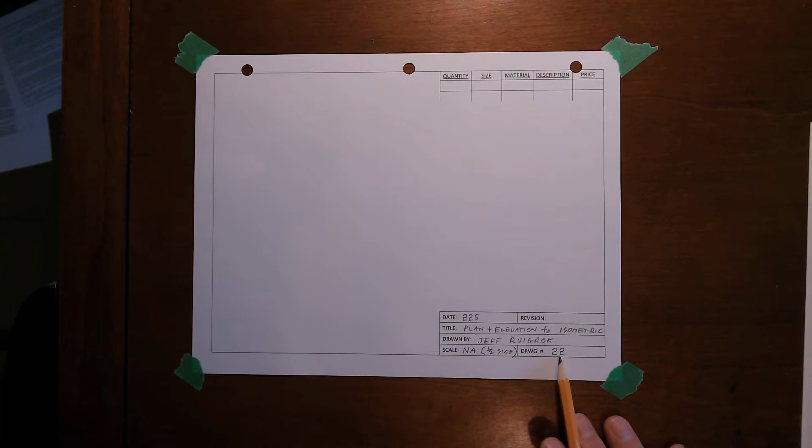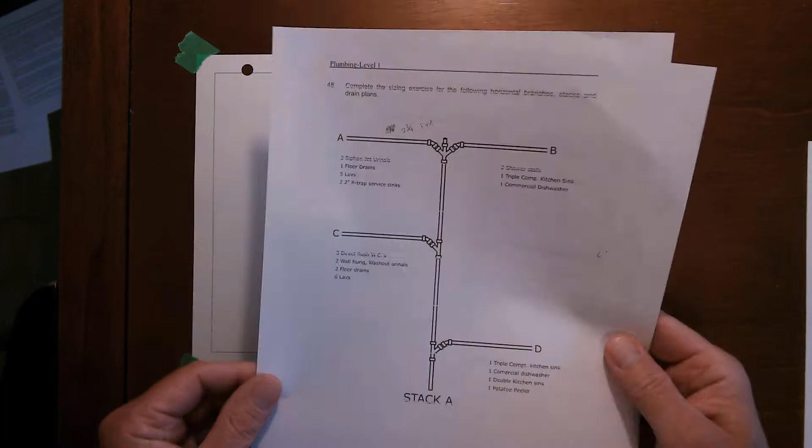And this is drawing number 22, and it's directly related to the sizing of the stacks we did in the first part of this course. There was stack A, stack B, and then a plan view with the building drain and the building sewer.

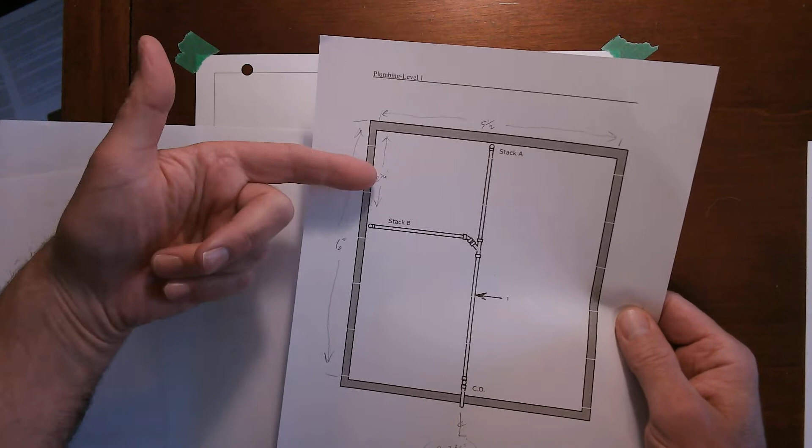Anyways, you can see I've got some dimensions here. So as I said, this is 6 inches on the inside, so I'm going to be drawing it at 3 inches. And this was 2 1/4, so it's going to be drawn at 1 1/8. That's it for scale. Think of it as a custom scale, if you will. Anyways, we're going to draw this in isometric. There's not a lot to it beyond the detail box, which is what I'm going to start with.

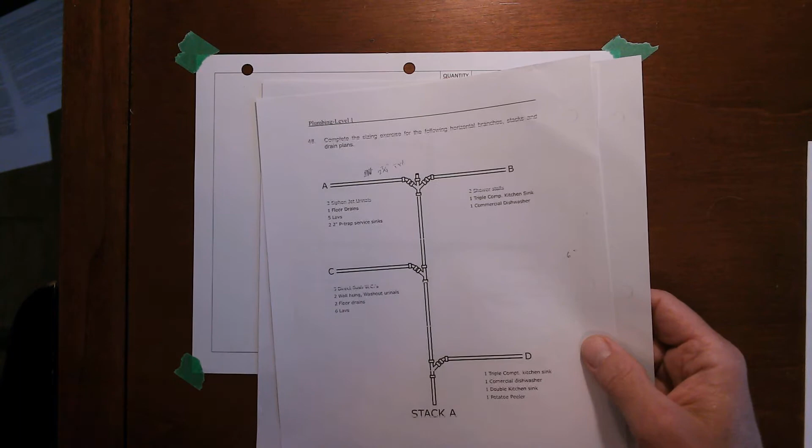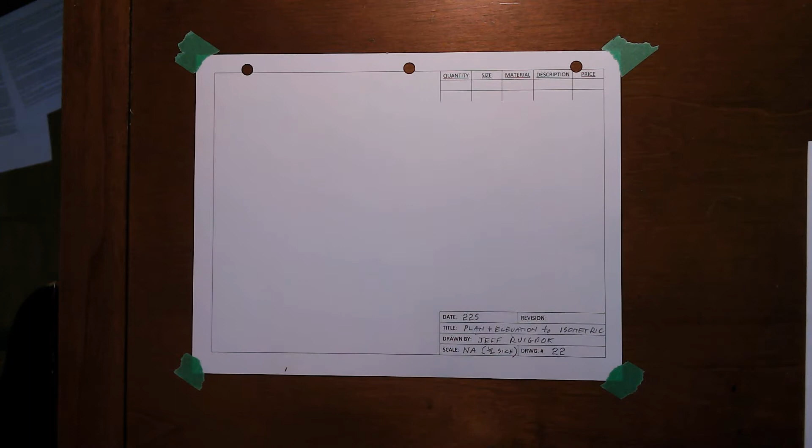In fact, I'm going to do this in reverse. I'm going to do the plan first, stack B second, and then finally stack A. Not obligated to do it this way, but I like to start with a solid foundation, which simply means, for me anyways, starting at the bottom and working my way up. Because this has a general outline, I'm going to use this general outline, the 6 by 5.5 or 3 by 2 3/4, as my detail box, and then I'll build my piping plan up from there.

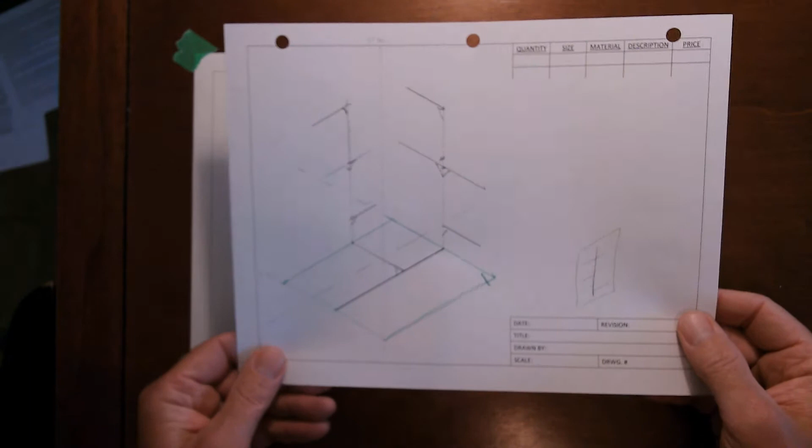A lot of the detail boxes we've been doing are three-dimensional. This one's not going to be, it's the green lines here. It's just going to be a flat one, but then you can see my building drain runs right through the center of the building with that horizontal branch going off to the side, and then the 2 stacks. Anyway, so this is my rough. I always have a rough to go along with my intended drawing. In this case, I had to work really hard to find the right size to fit.

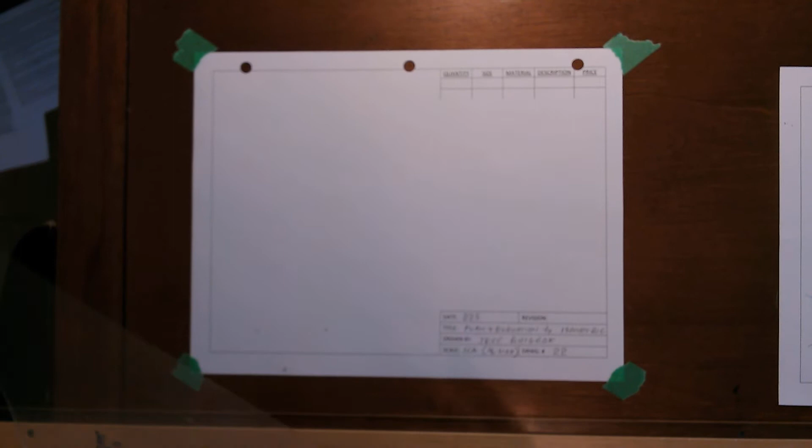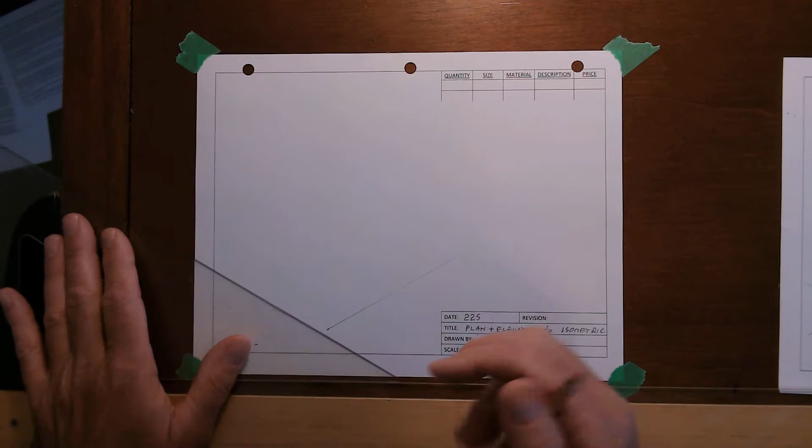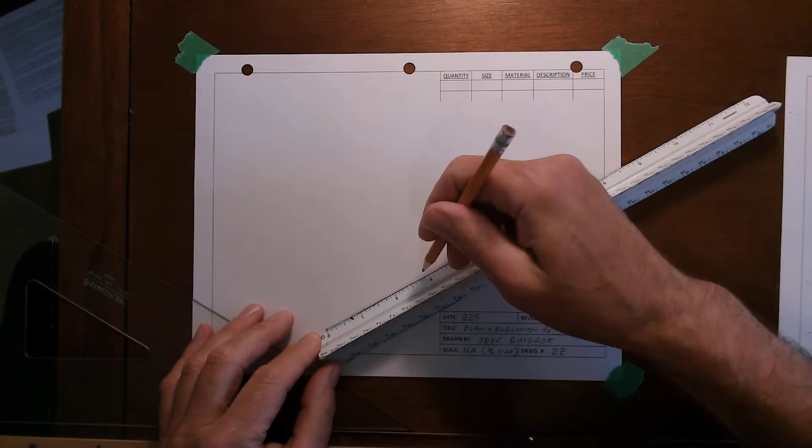Anyways, isometric drawing is a 30-degree angle. I'm going to start right here in the middle, down nice and low so we have lots of room. I'm not doing the vertical aspects of this detail box. I am merely doing the outline. But the same rules of the road apply here as they did to everything else. So this is going to be my 6 inch cut in half, 3 inch. And this one is going to be my 5.5 cut down to 2 3/4.

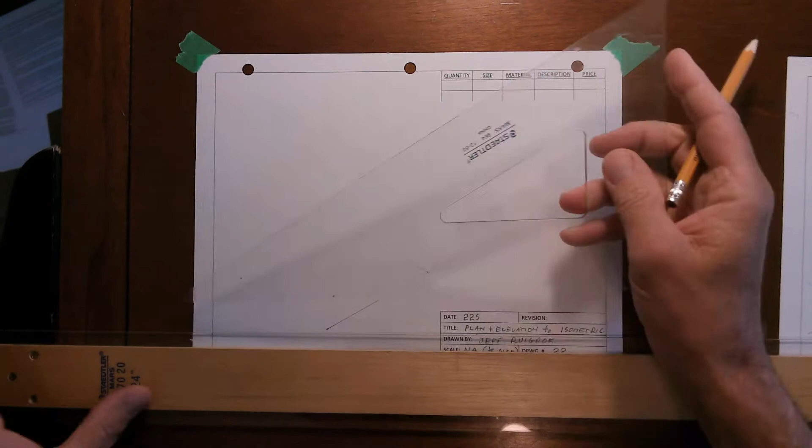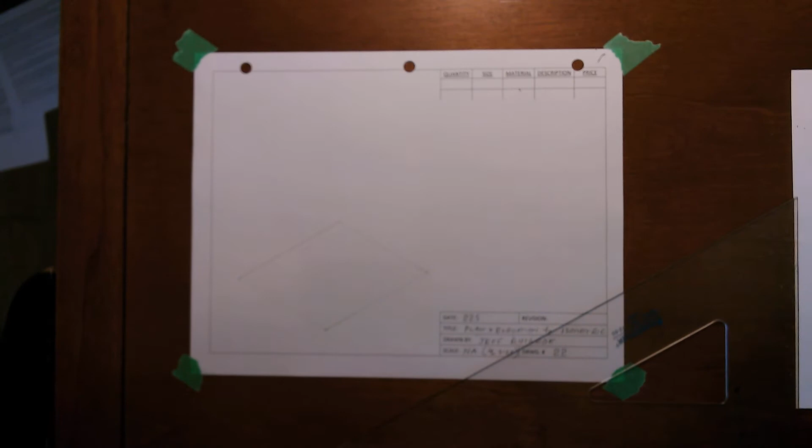So horizontal lines only. I'm not going to embolden this because it's not the piping that I want to show, so it doesn't help with my design intent. It just helps me with my strategies for drawing, and what I've been referring to as spotting. So in this case, I know my building drain runs up through the middle of the drawing, which is at 2 3/4, which I can cut in half. So I just need to find that dimension.

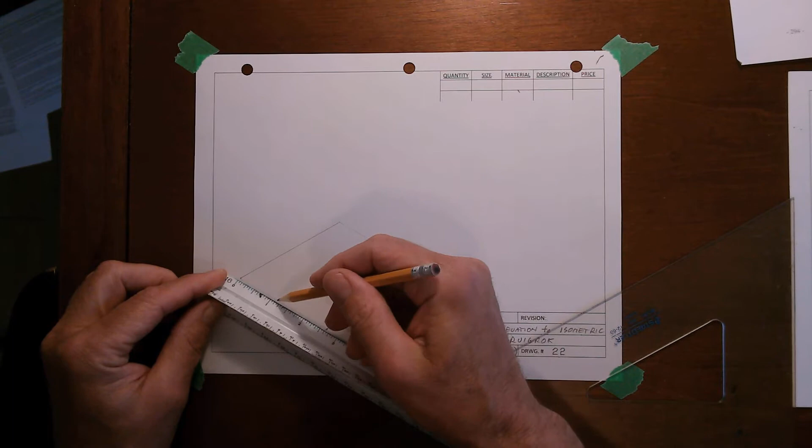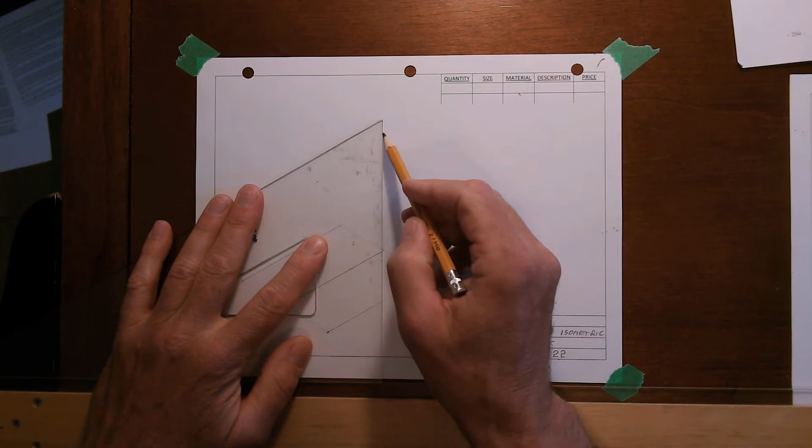So we got 1 1/4, 1 and... So there we go. So that's the center line here, and that's where my building drain runs, from just outside the building all the way to stack A. And then stack A just goes up. So that's the stack that goes vertical. And I can embolden this line because that's not going to change much at all.

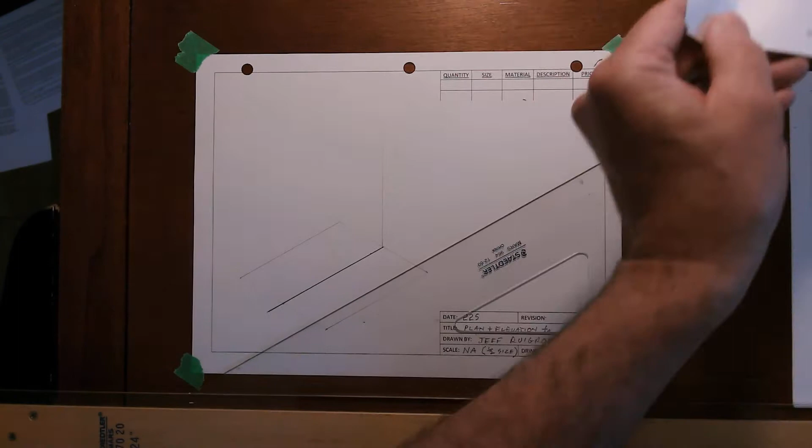Stack B is 2 1/4 inches down, so I'm going to make that 1 1/8. Again, I'm just going to mark it here and then draw it across. So I'm using the detail box to put all my measurements on. So 1 1/8.

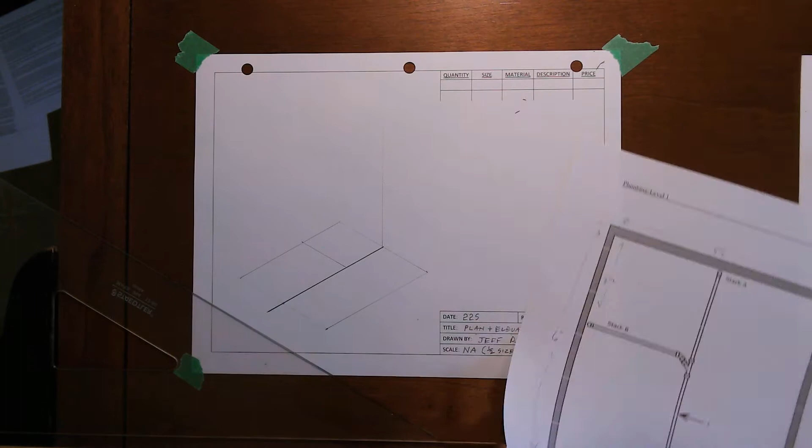Now, here is the first trick to drawing isometric diagonal lines. And the term that I'll sometimes use is draw it square and shave it a hair. So you'll see that there's a 45-degree elbow here and then a Y fitting. So I can't just draw straight into this. In fact, you're not allowed to lie a TY down on its side. Remember, this is looking down. You can't have a TY here. It must be a Y.

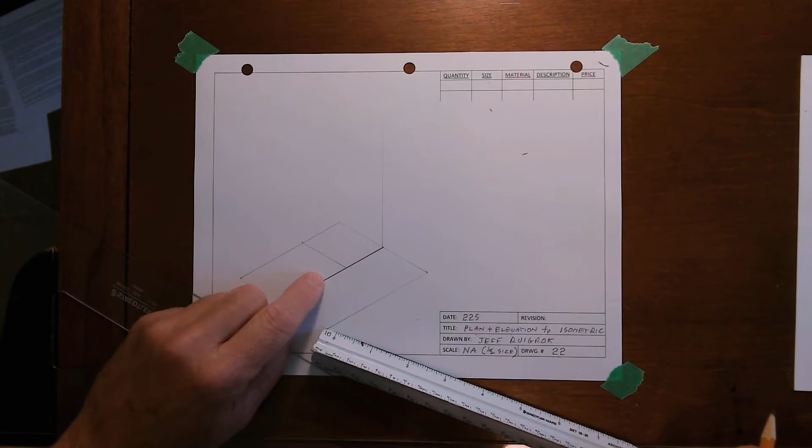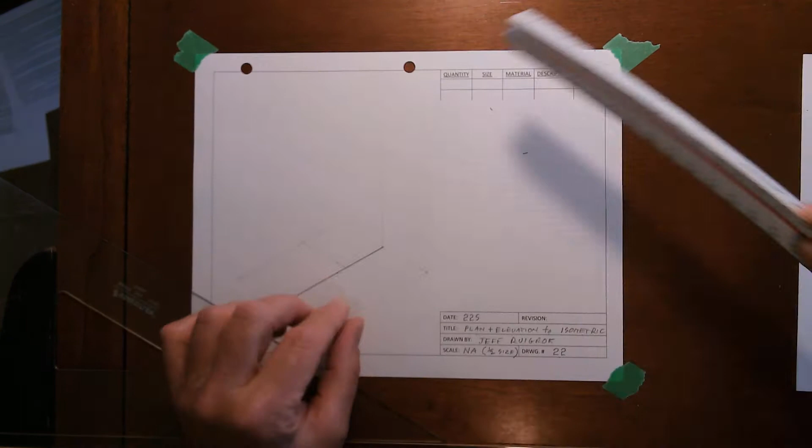So when I say draw it square, I mean draw it just like at right angles. So this is an isometric right angle. And then if you go 1/4 inch that way and 1/4 inch that way, you'll have an equal 1/4 inch. You have 1/4 inch this way, 1/4 inch this way. So that means you've got a 45-degree angle in between.

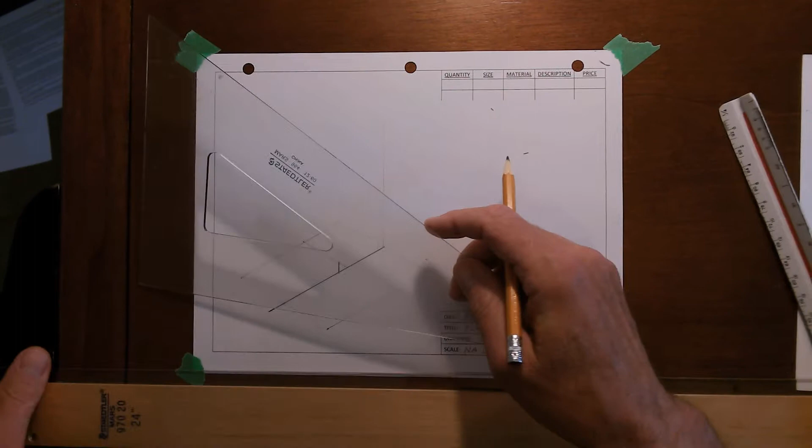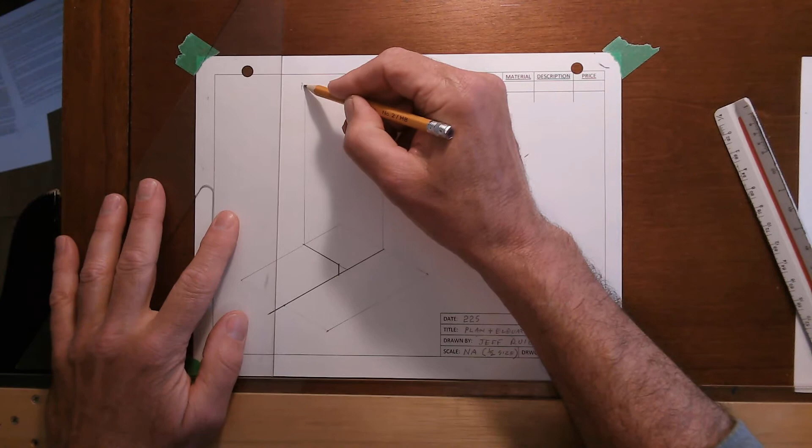And you will see that this 45-degree pipe looks vertical. I assure you it's not, but unfortunately, whether you like it or not, oops, the camera's in the way, it looks it. So there's stack B. So this is A, this is B, and this is point 1 on the drawing.

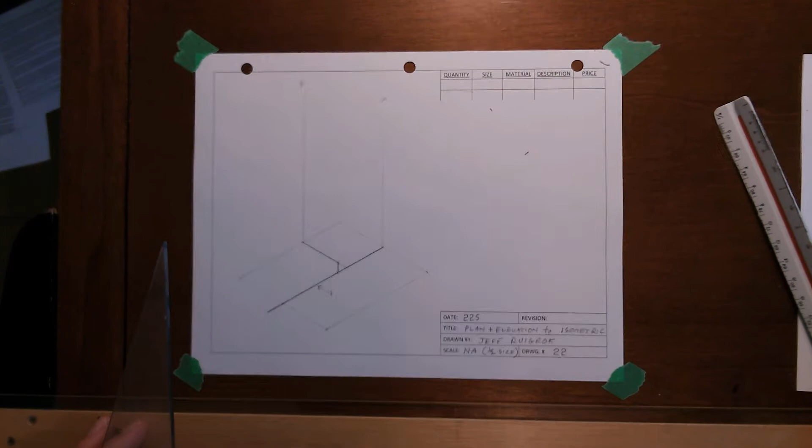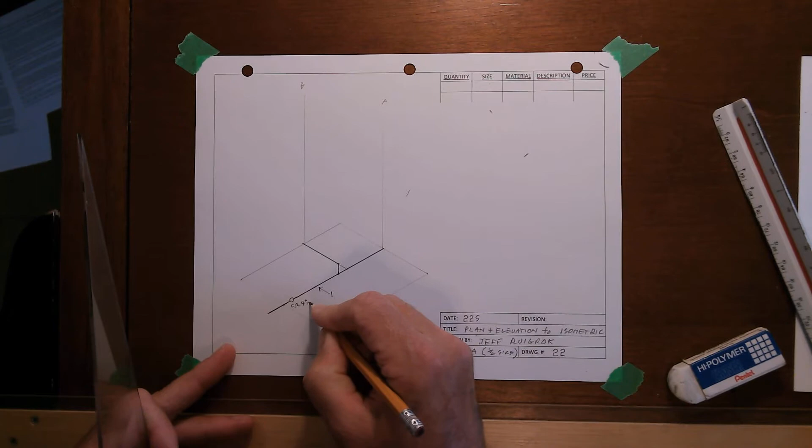I suppose if you wanted to, you could also put a clean out, because it does show one here. And because that's the building drain, you also know it's 4 inches minimum. Okay, there we go. So this is what I call draw it square and shave it a hair. You just draw everything at right angles. Then you create your 45-degree isosceles triangle here with the 2 equal sides. And then you know you're 45 degrees across. Anyway, so there you go.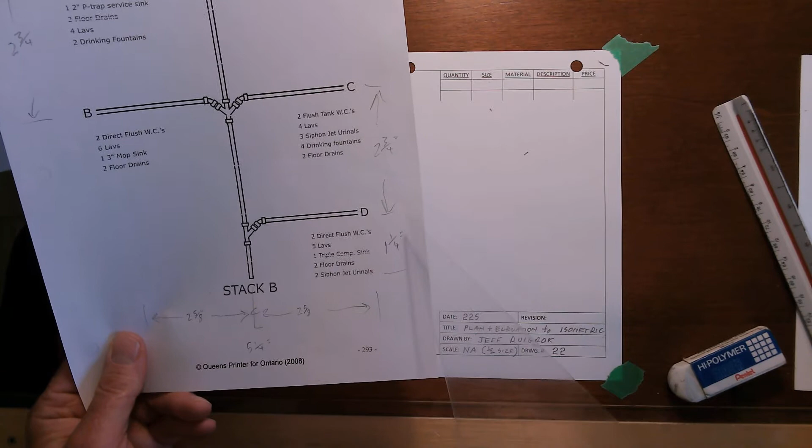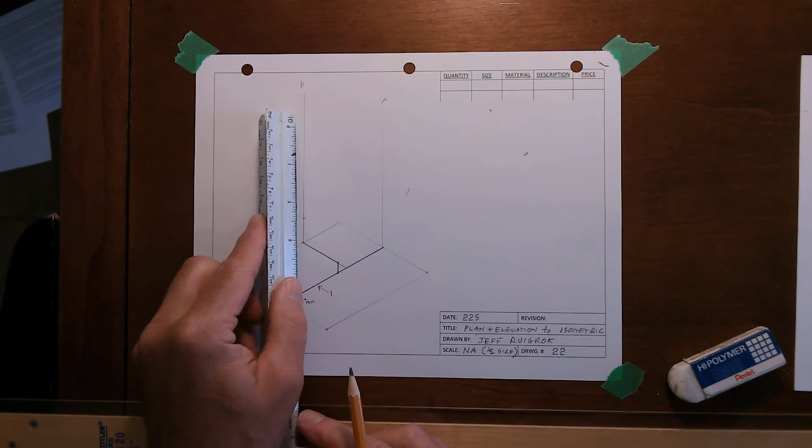So there's that one. Next one will be stack B. And we have 1 1/4 up for branch D, and then 2 3/4 of an inch above that for C and B, and then the same again for A. So I will, of course, again cut those all in half. So 1 1/4, so I'm looking for 5/8 to the first one. Jeez. My ruler's not fitting in here. So 2 3/4, so that's 2 1/2, 2 3/4.

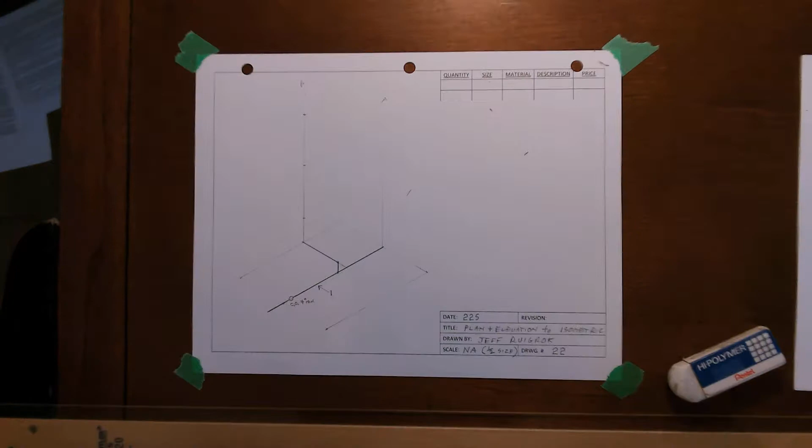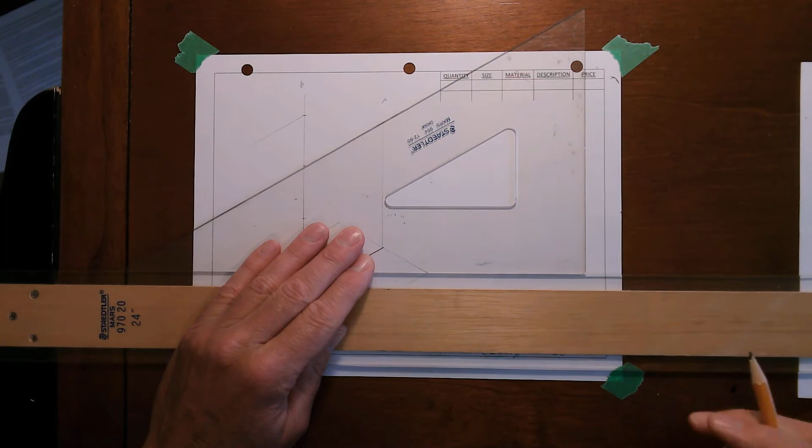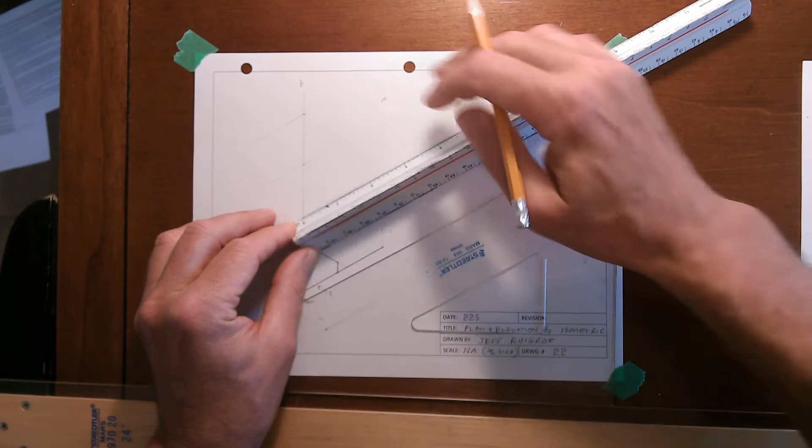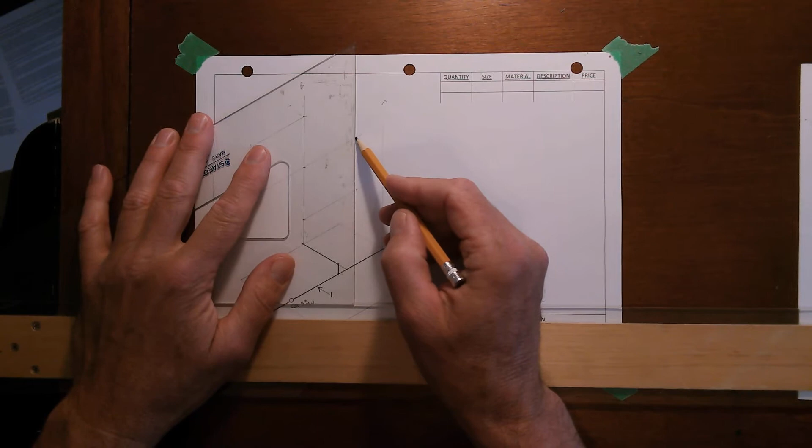So A goes to the left. This would be B and C. B goes to the left, C to the right, and then D just to the right. These are in fact 2 3/4, so 1 3/8 out. Didn't quite draw this one far enough, did I? Remember, you only have to measure once, and then you can use that measurement in your T-square to make it identical all the way around.

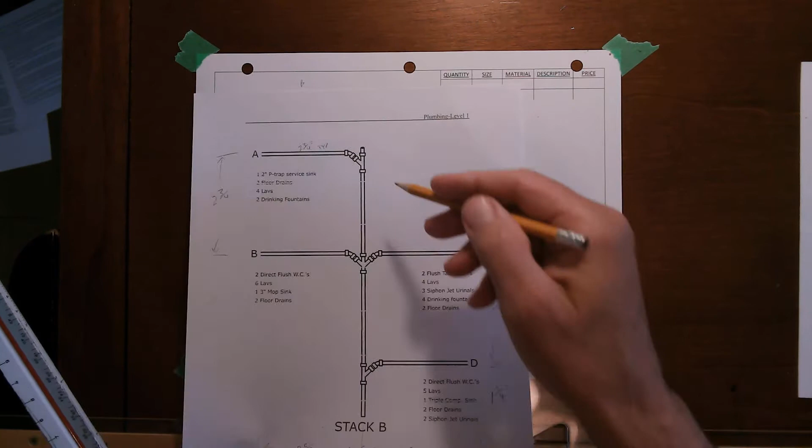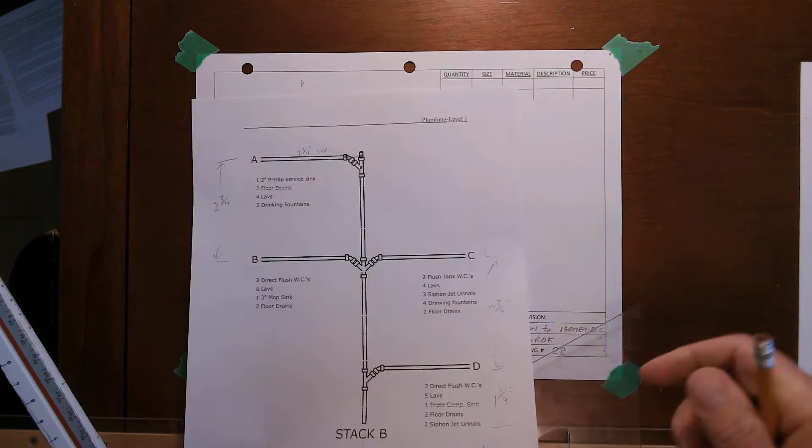So the same thing for these. This has actually got a 45 with a Y and a short piece of pipe. Same here and there. So this is a single Y, a double Y, and a single Y. Anyway, so we just have to, again, this distance between here and this distance between here and here. So the inlet of the Y and the distance between the 45 over is equal. So if this was 1, this would be 1, this would be 1.4142, right? So there's typical offset calculations. So I'm just going to go with the 1/4 inch again.

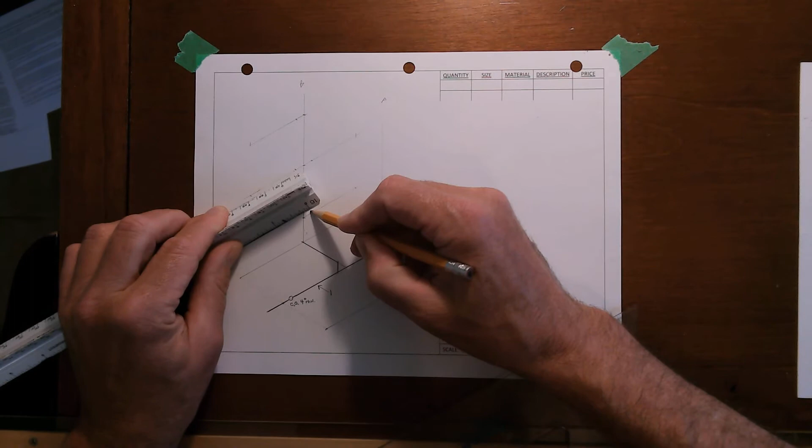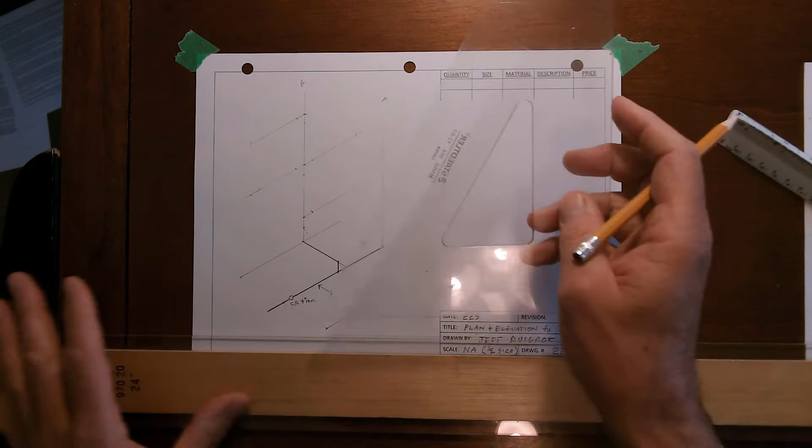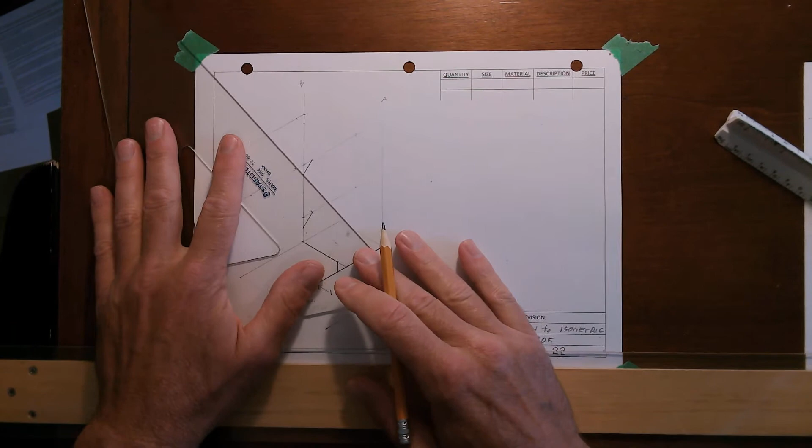And then a 1/4 inch down. And what you will find is that when you're doing a 45-degree angle on a vertical stack, you'll find it to be about 60. So you can create a rule here if you want. Diagonals off the vertical can be drawn at 60. I don't know if it's going to work quite so well on the other side because you get some perspective shift here.

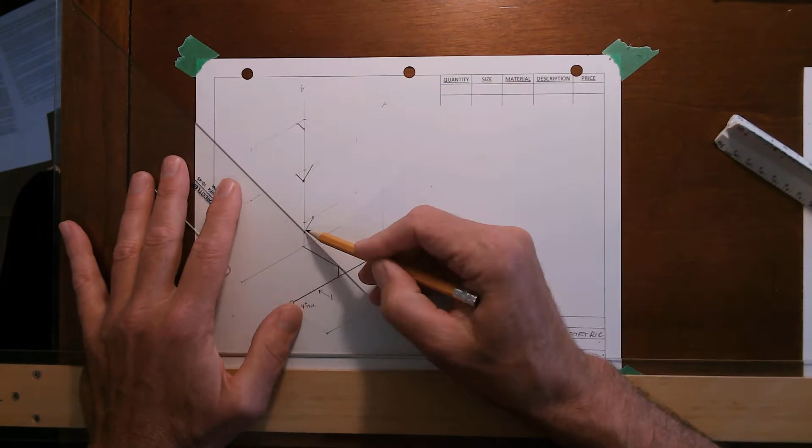I suspect this one's going to be 45. Yep, close enough. I'm going with close enough. Obviously, I could use the measurements. Nope, that's it. I'm going with close enough just to make my life easier. But you can just go from tick to tick.

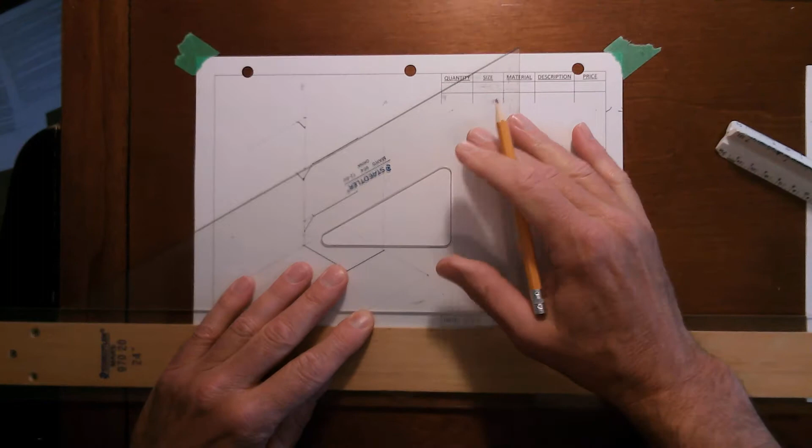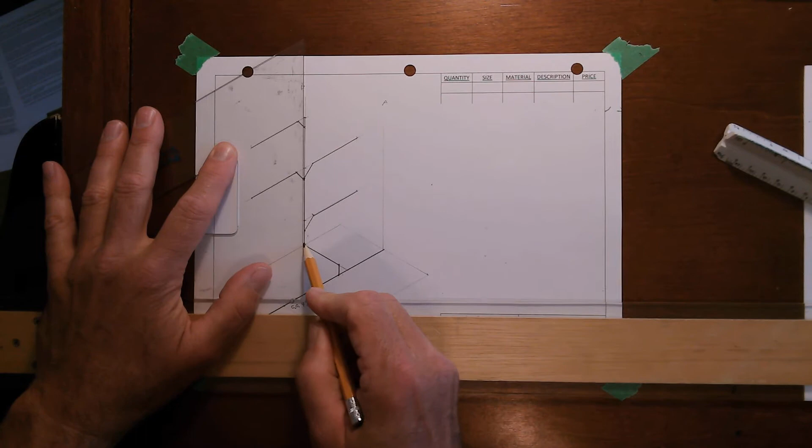I think it's important to point out that isometric drawings are also called artistic renderings. So there's tons of artistic license when you're doing isometrics. As a matter of fact, in reality, when you turn a box towards you, and then flip it up at 30 degrees, the lines appear to get about 20% shorter. There is such a thing as an isometric scale that we're not using.

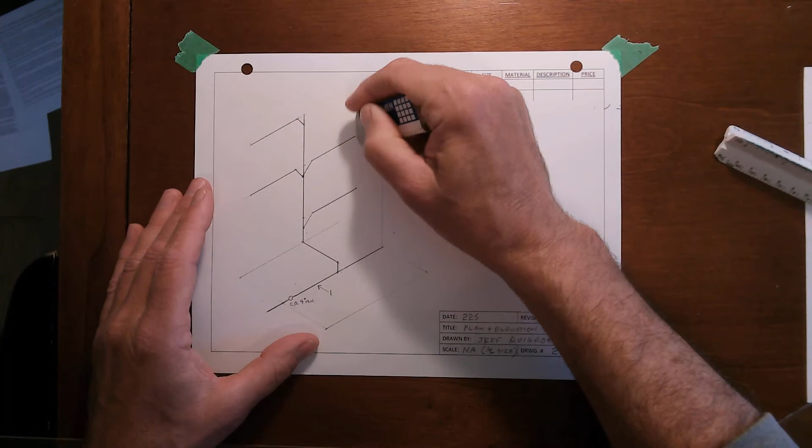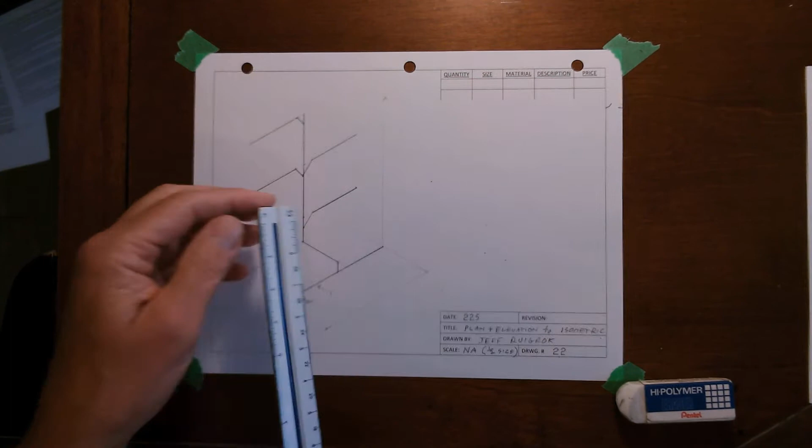It would make our drawings more accurate. So you can see how that's starting to come together. Now let's do the next one. So it's going to be the same, which was 5/8 up from the bottom. Oops, get the right scale here. So we have 5/8 up from the bottom.

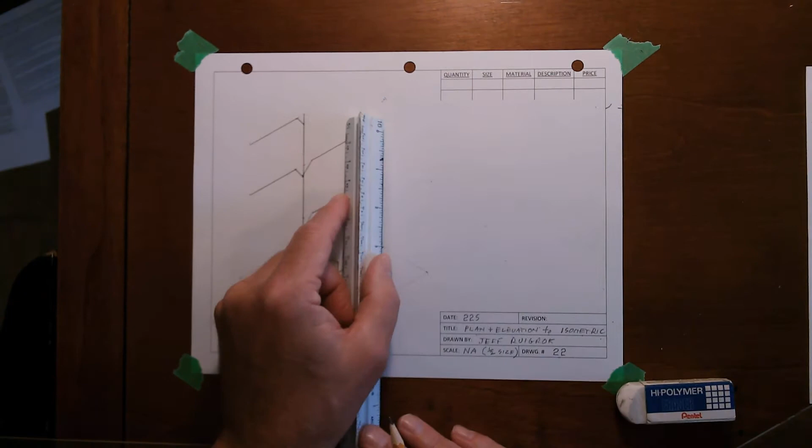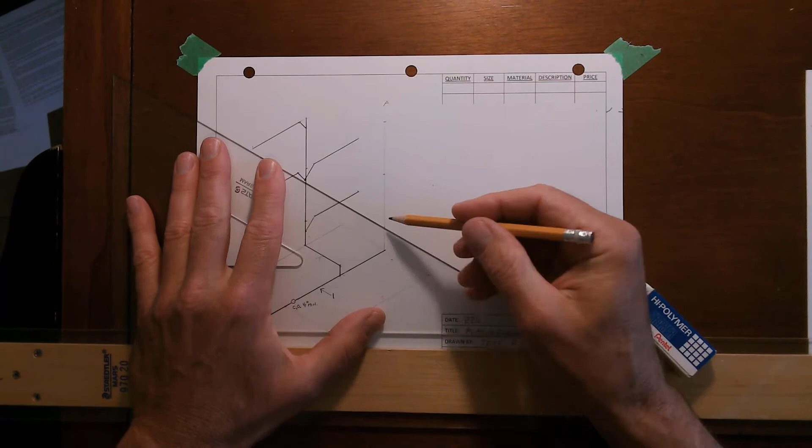And then we had, what was it? Oh, 1 3/8. Is that all we did? And then 1 3/8. Oh, we're not quite tall enough for this one. And for this particular stack, the lowest portion, so this is stack A, D at the bottom ran to the right. C ran to the left. And AB ran both directions.

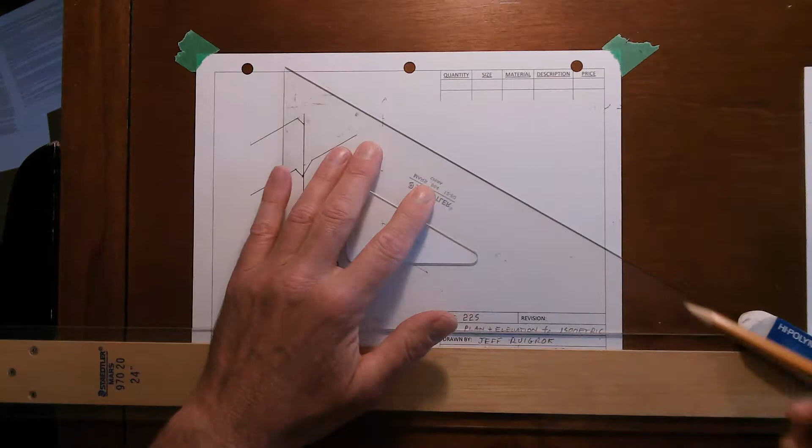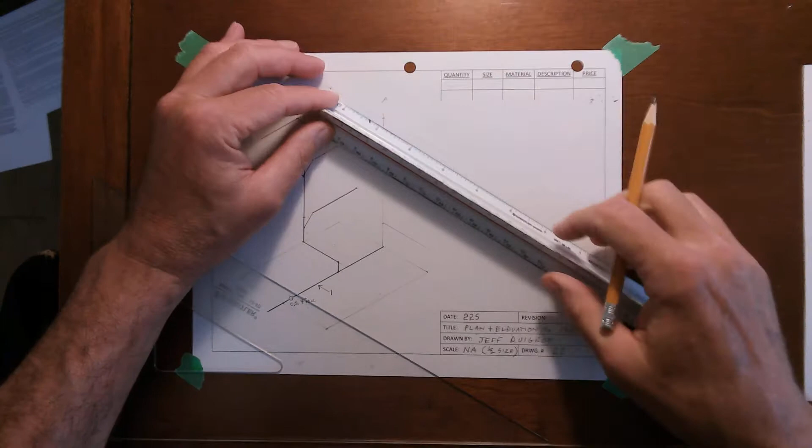The distance out, what distance did I do? Ugh. I did 1 5/8. So, oh, we're going to have a pipe crossing over here. 1 5/8, 1 5/8, 1 5/8, 1 5/8. And then again, we're going to back off here 1/4 inch. Back off there 1/4 of an inch.

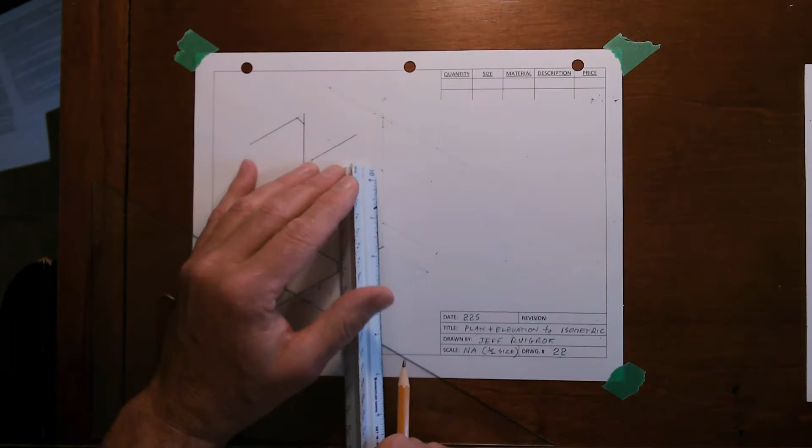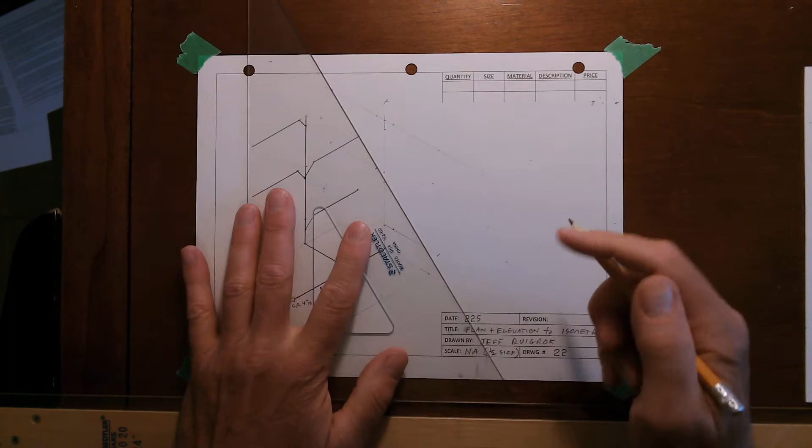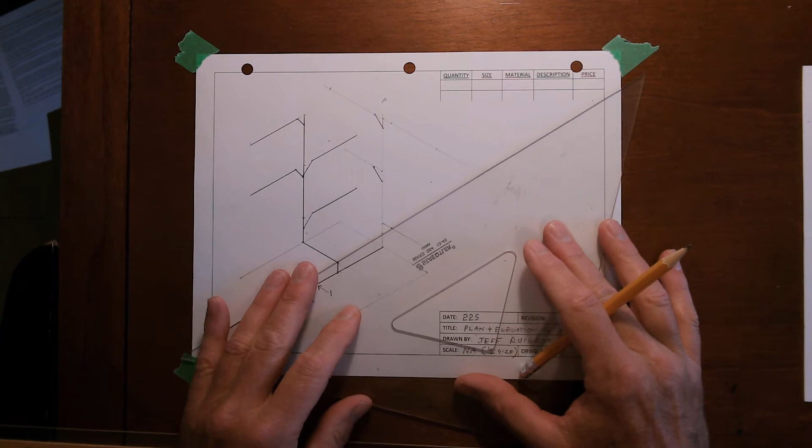So again, I'm just drawing it square first to begin, and then I'm cutting the corner. So there we go. So I'm using the 60-degree triangle here. And it's not exact. Unfortunately, isometrics, nothing is ever exact. And then I'm going to use my 45-degree triangle going the other way, because I'm going to go as the crow flies on this one. There we go. The other one I used 45 degrees here, but it was off by about 3 or 4 degrees.

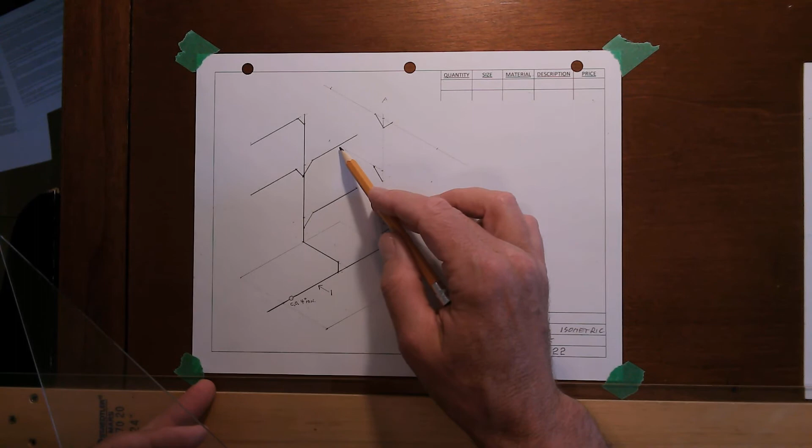So you have to decide which pipe is in front of which. And because this one is closer to me, the viewer, I'm going to break. It's called an interference fit. I'm going to break this line as it goes across underneath stack B. So stack A is a little bit further away. Yep.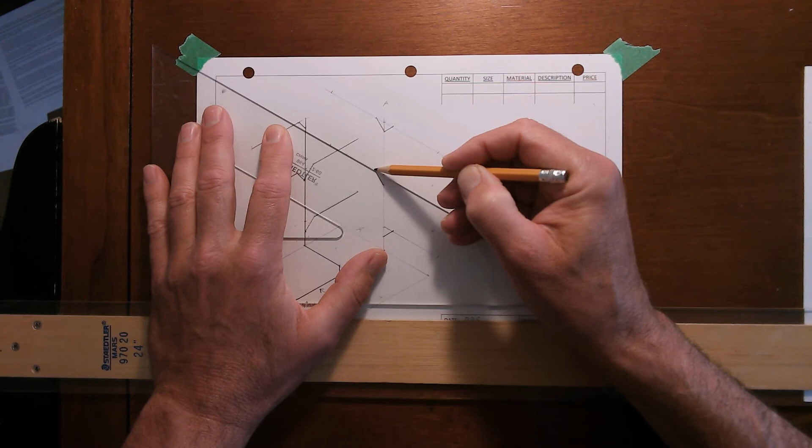And I'm not going to say I'm right with this. I suppose you could look at it the other way, almost like they can make contact. I have to think about that one. These are theoretical drawings, so maybe they never thought about having these converted to isometric.

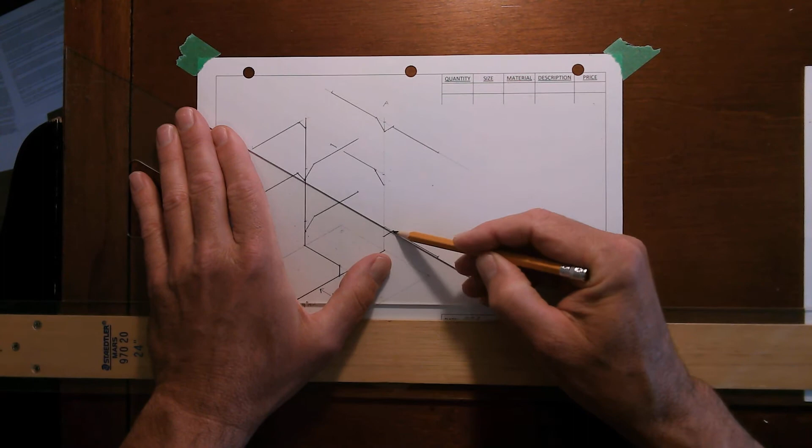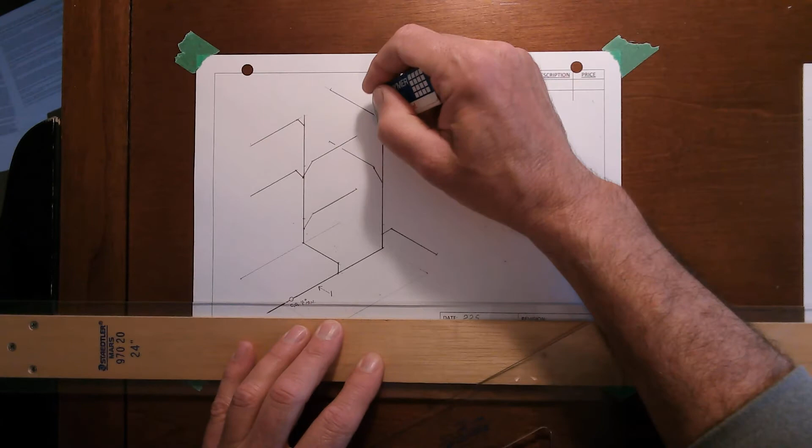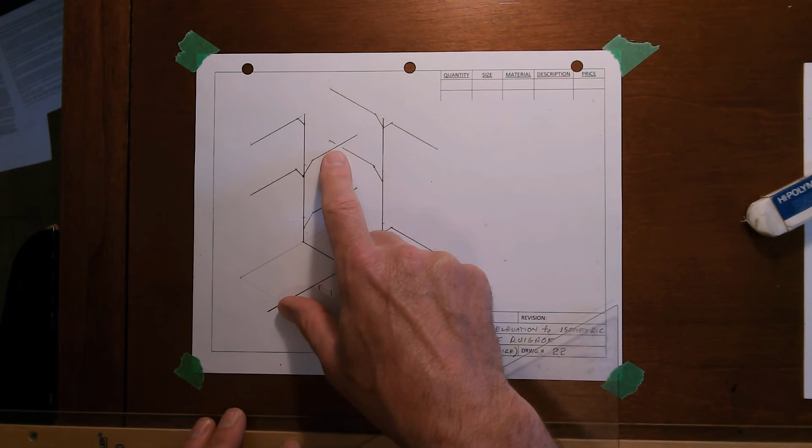Again, don't forget to sharpen your pencil as you go. Just give it a little twist. And go ahead and erase all the excess. So there you go. I've got this one just a little bit lower. I'm not sure that that's right, but you had to pick one to go over and one to go under. So it happened to be a random selection for me, but there you go.

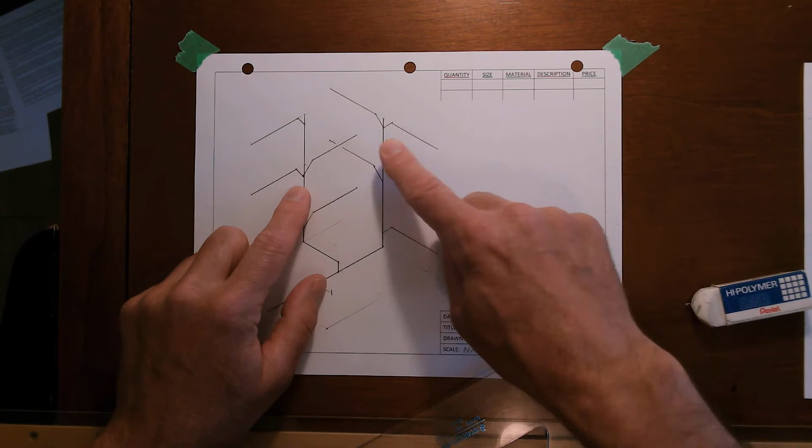Stack A was under. My detail box was very subtle, to be non-existent, although it helped me with my spotting. I've included all the fittings here. They're all drawn separately. I could make my material list now. There's 2 double Ys, 1, 2, 3, 4 single Ys, and so on. 1, 2, 3, 4, 5, 6, 7, 8 45s, 9 45s. There's another Y. Anyway, it's a 90. So you could go on and make your material list.

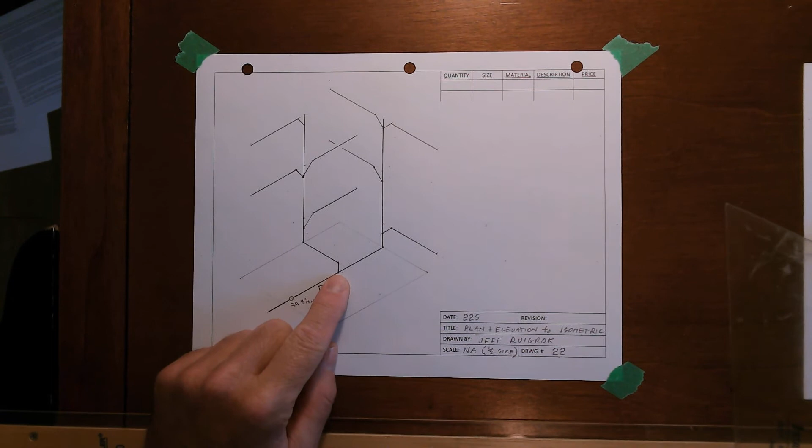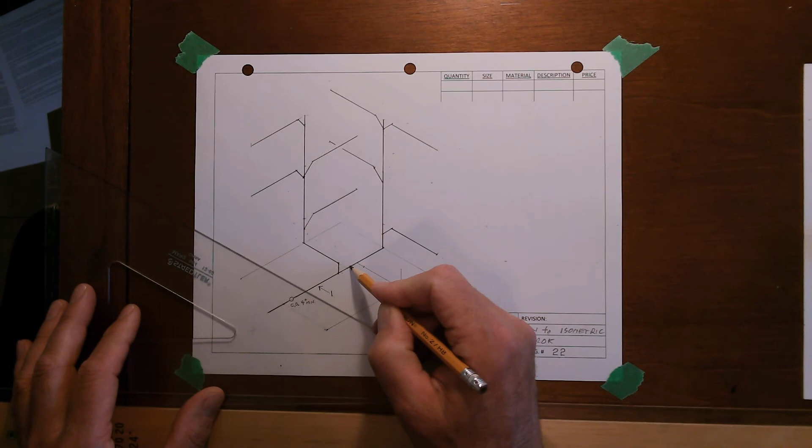Also, this diagonal pipe looks vertical on my drawing when it's actually 45. It's important to know that if we'd gone the other way, and put something in here for a stack, had you backed off here and here, it would have looked horizontal, even though in reality that would be a Y and a 45.

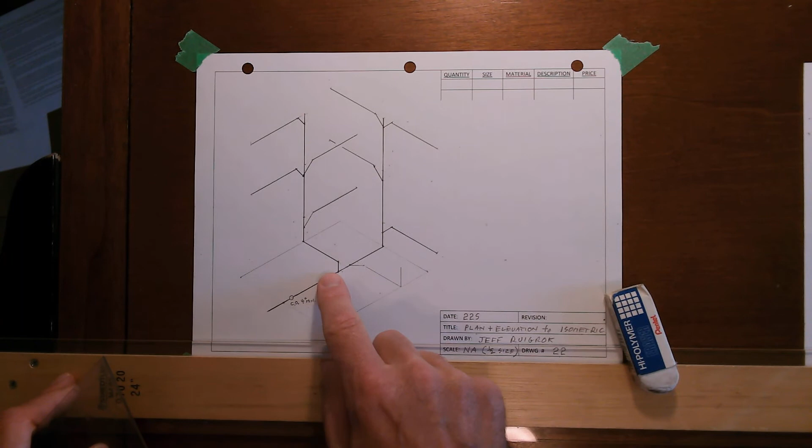So those diagonal pipes, once you got the detail box down, the basic shape of a box and the things that go in it, you're fine. But when it comes to the diagonals, you have to know they can be horizontal looking, they can be vertical looking, they can be 60, virtually any angle. But basically, look for horizontalish, verticalish, 45-ish, and 60-ish. But they are artistic renderings. Anyways, I hope that was helpful.

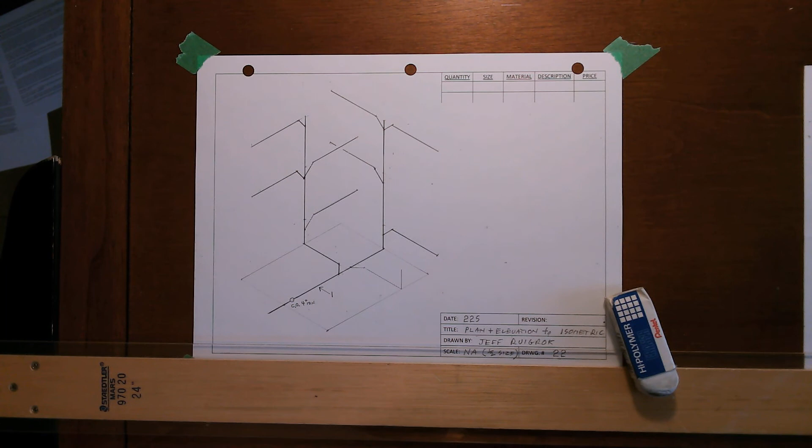Yeah, and that's it. Thanks. Any questions, let me know. That's drawing number 22 in your introduction to the second half of pipe drawings.